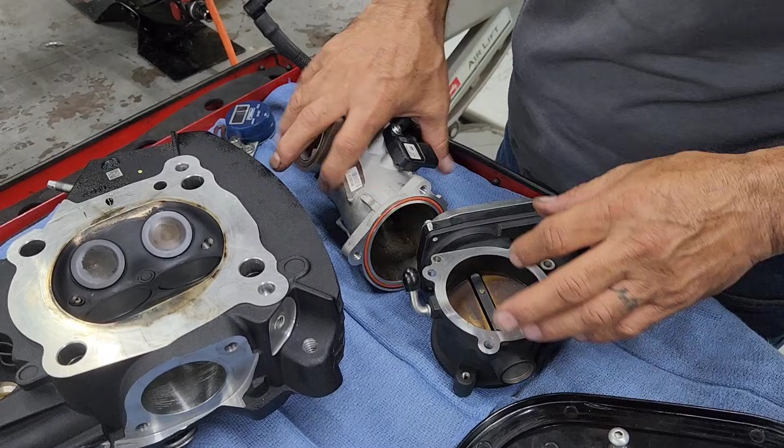But I want to show you the Screamin Eagle throttle body and manifold. So here we have the 64 millimeter throttle body, and here is the manifold. These are some nice Screamin Eagle CNC ported heads, the CNC Extreme ported, and it's a nice head, oversized valve.

What I wanted to show you was the intake runner here on the manifold does not match your port on your head. So we're gonna come in here and port this to match the head, but also wanted to show you that we're gonna go ahead and open this part up here, and then we're gonna open up the throttle body as well to match it, get a little bit more intake in there.

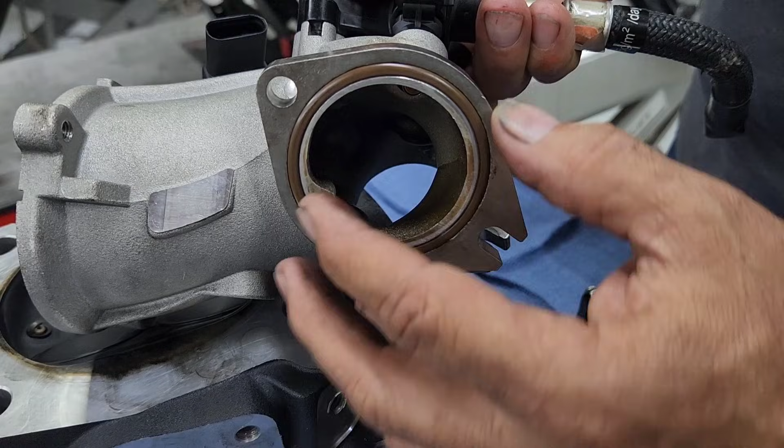Something that I myself don't like very much is, if you can see in there, that design is to help with flow, to get the air to turn and go into the manifold. But what we're going to do is remove a little bit of that. I am going to leave some of it in there, but I'm going to go ahead and start opening that and get rid of some of that so we can get some more flow in there.

So this is now the process of what we're going to do. And I'll show you guys the process as we're going along so you guys can keep up with it.

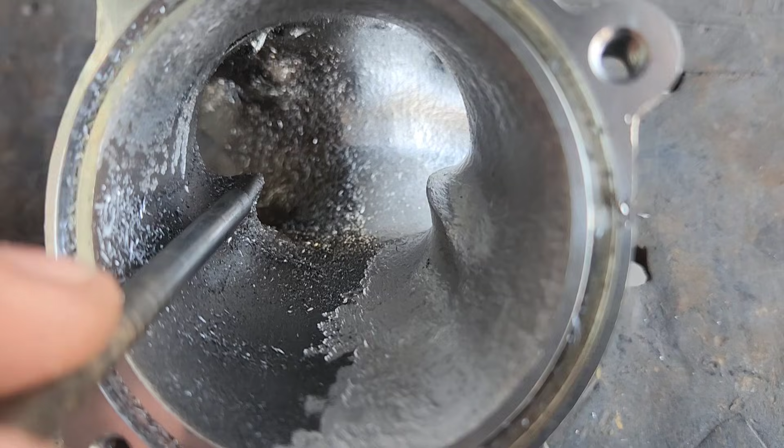So we have started doing the porting on the manifold itself. What I'm going to do is show you, see if I can zoom in here a little bit. So here is the left side. Oh, this is the original way it came. And this part's kind of lifted up high, and this I already kind of grinded down a little bit of this one, started shaping it. I still need to finish doing the shaping, but...

I'm at a point right here where I'd like to show you the difference. So what's happening is, picture you and your buddies in high school running down the hallway, and now you have somebody that's in your way, and you kind of have to bump that guy to go around them. Same thing here. So the air's trying to flow in here, there's some obstruction, and the air needs to go around it. So it does help a little bit to do this curve right here, this turn right here.

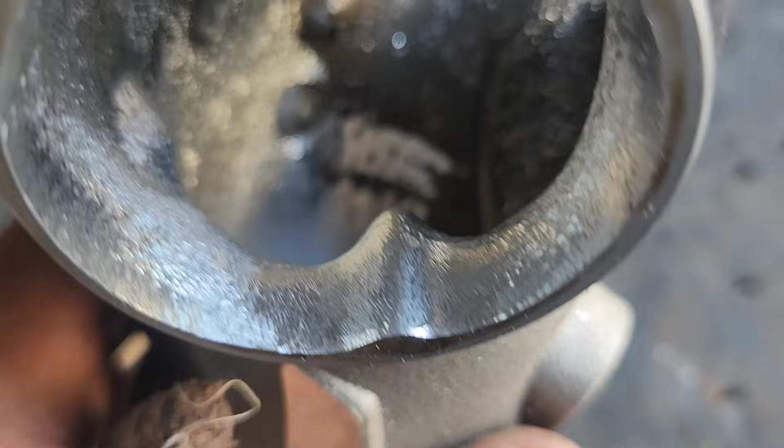So if you go to this side, you can see a little bit here where that curve is. So it does help a little bit, since the airflow doesn't really like 90 degrees, so it's helping give it that turn that's going to go out of here and into your heads. I just want to take a minute to show you that. I'm going to continue grinding the rest and probably show you the process once we're a little bit further. But a good understanding of that is that that is too high for me, at least, and is really obstructing the air. So let me continue with this, and then I'll show you guys as we go along.

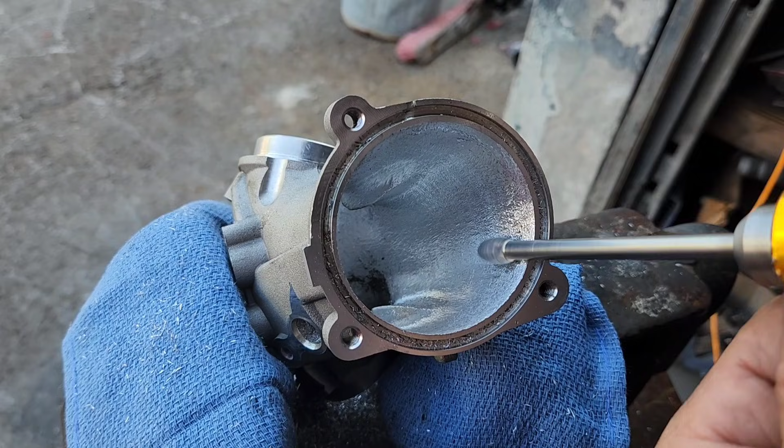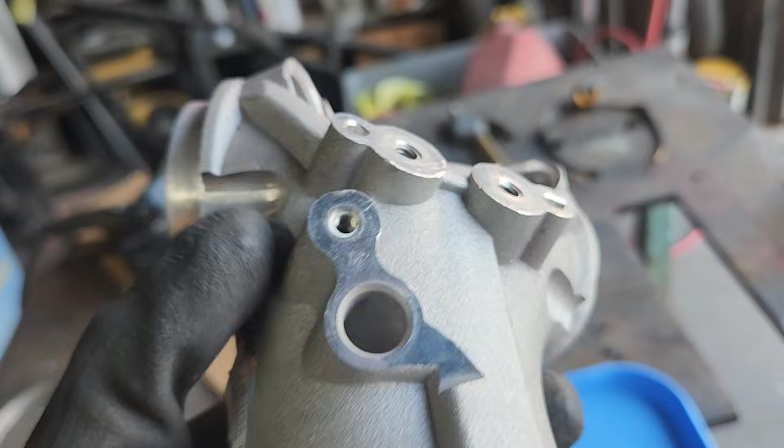Alright guys, so here is the manifold done, already smoothened out. So this just needs to get washed and cleaned, get ready for assembly.

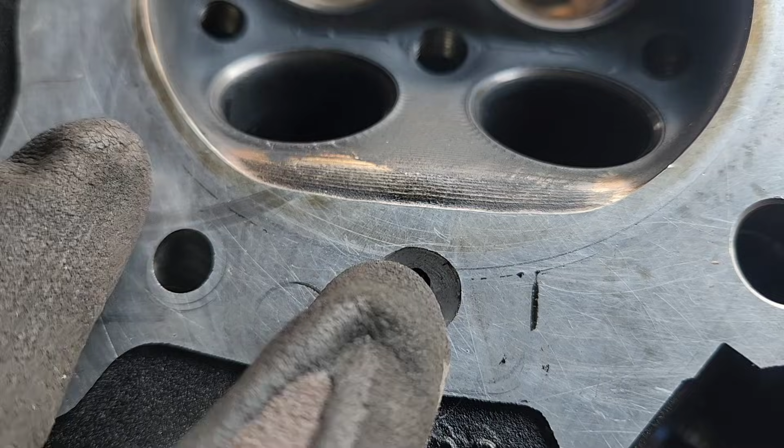So here are the heads. What we're doing now is we machined this and made it tapered, drilled the hole a little bit bigger, and so what we're going to do is weld and plug that hole there. Just did this head here.

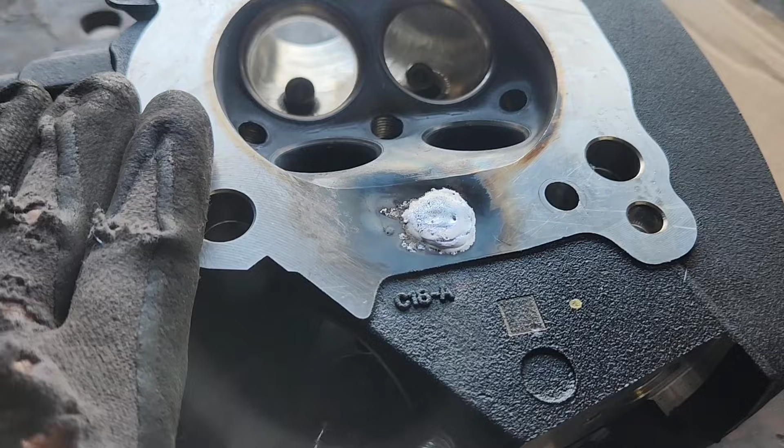So then what we're going to do is set the heads up on the jig, put them on the lathe, machine them down to this deck here, and then we're going to deck the heads probably around 14 thousandths to bump up the compression. What I'm going to do now is finish this head, and I'll get everything jigged up.

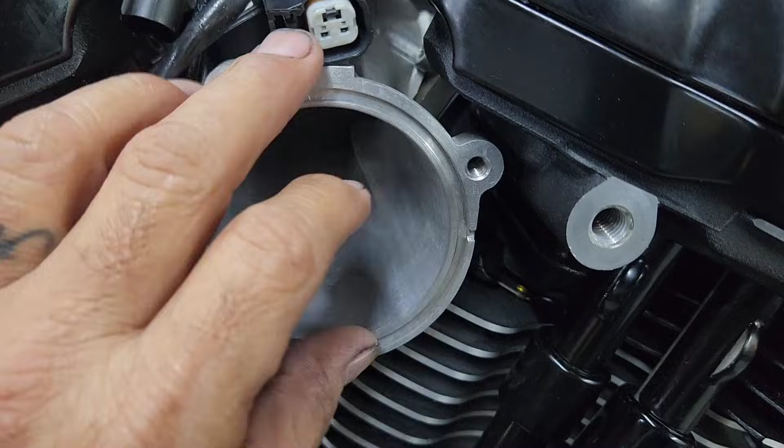So the next thing for me is to machine the inner part of the throttle body. I'm going to chuck that up in the lathe, and then I'll show you guys the machining part.

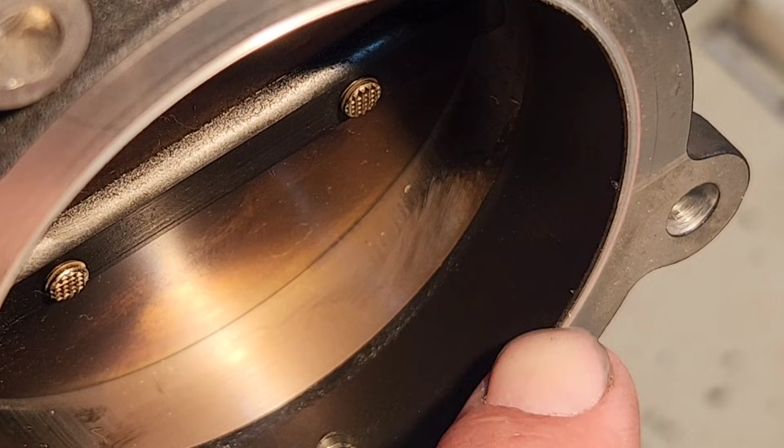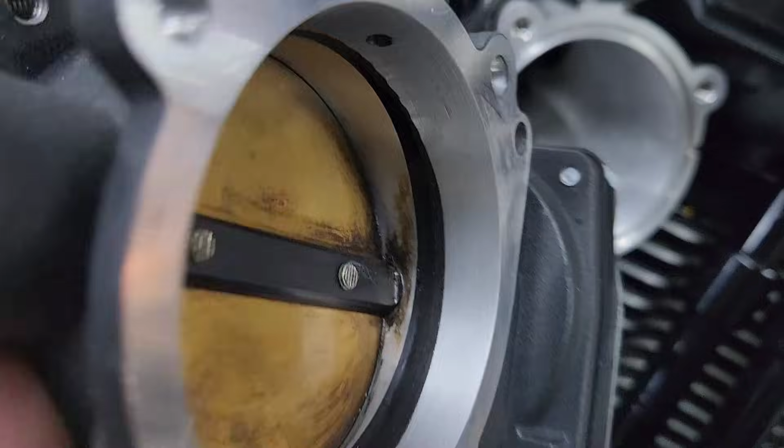Once we have this part done, we're going to take it off, flip it around, and do the other side. Alright, so here is the throttle body machined — nice little taper there.

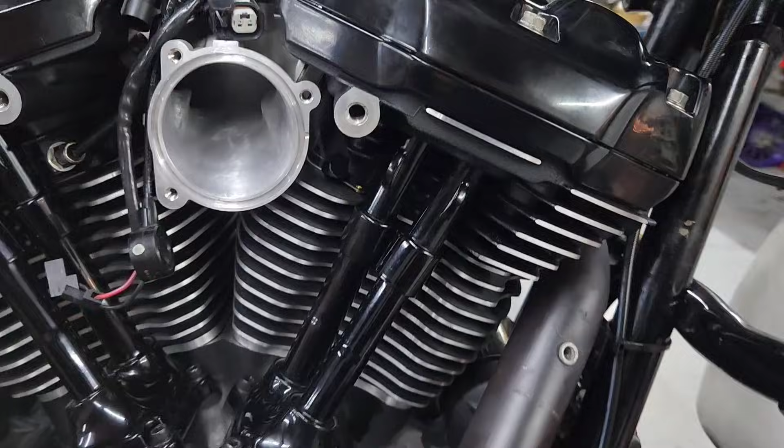So what we're going to do next is install it, get everything buttoned up, put the other rocker box cover on, the oil line and stuff that goes on top, and get everything ready so we can start this thing and do a couple of heat cycles. Let me get going with all that, then we'll continue with getting it on the dyno.

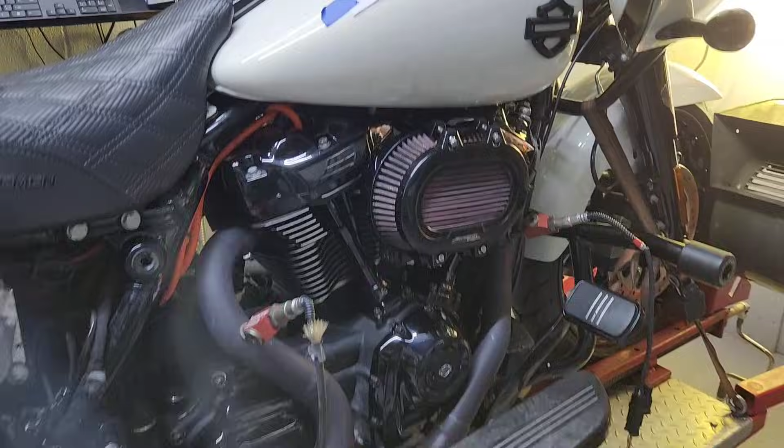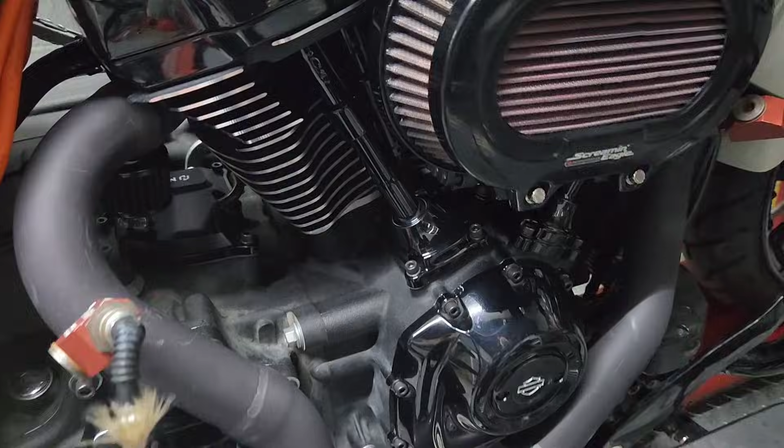Alright guys, so here we go. Once again, we did not perform the motor work on this — this was done at Throttle Harley-Davidson here in McAllen, Texas. It's a 129 cubic inch with an S&S 590 cam and D&D exhaust.

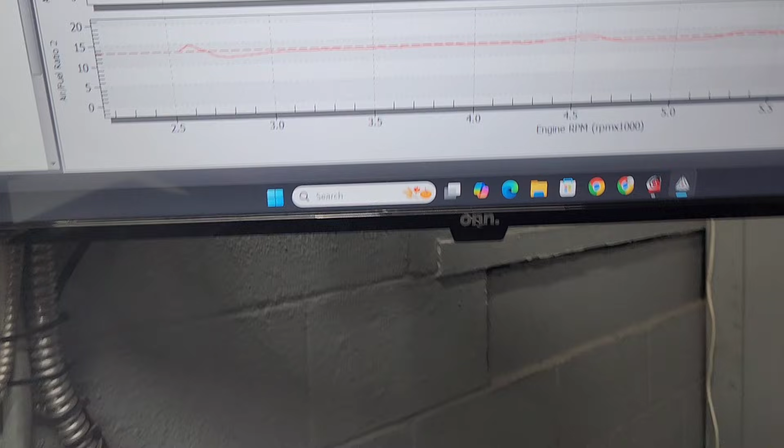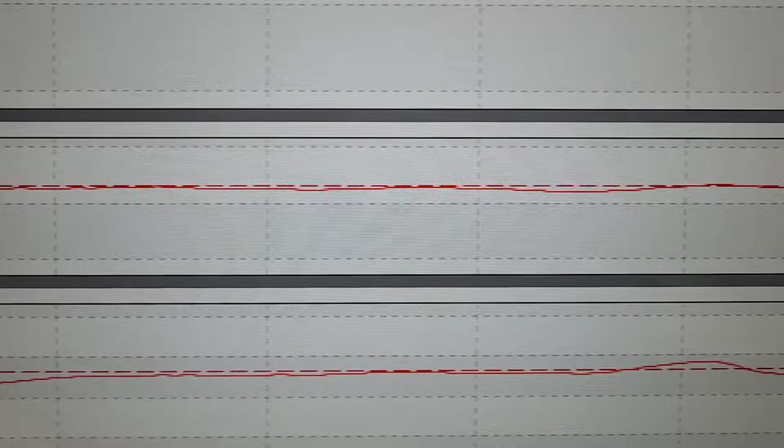This is the second time we dyno tuned this thing, and it was dyno tuned with a Power Vision. Now the first time it was a 129 with an Andrews 485 cam, and it was 136 horsepower, 155 torque — very, very impressive actually. Here are the AFRs. For being a 485 cam, very, very impressive.

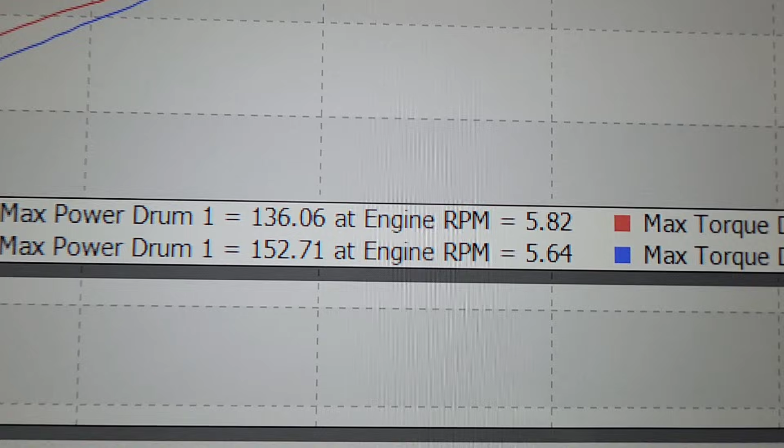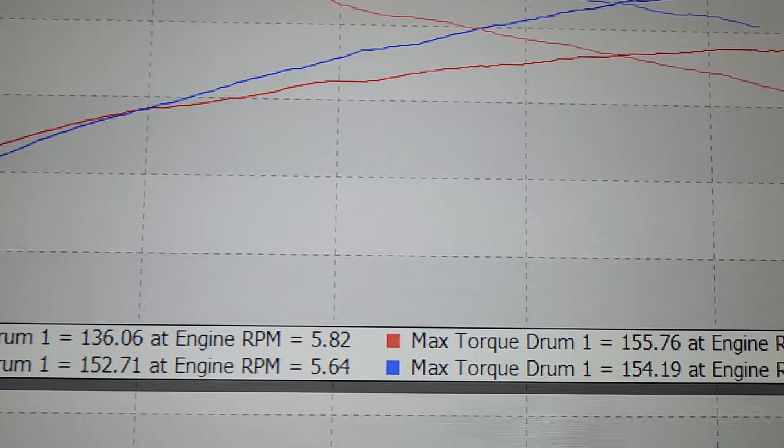So then we re-dyno tuned it and ended up with 152.7 horsepower and 154.19 torque. Here are the AFRs. This is with the S&S 590 cam — we got a lot of gains in horsepower and actually lost a little bit of torque, but overall, give me a minute to shut this off.

Overall, very, very impressive. So let's talk a little bit about the cam difference. The 485 cam's intake valve closes at 29, and the 590's intake valve closes at 43. So what does that mean? The Andrews cam, which is the red one, gives us a little bit more torque here at the beginning because the intake valve closes earlier, and our horsepower gain is early because it also closes earlier.

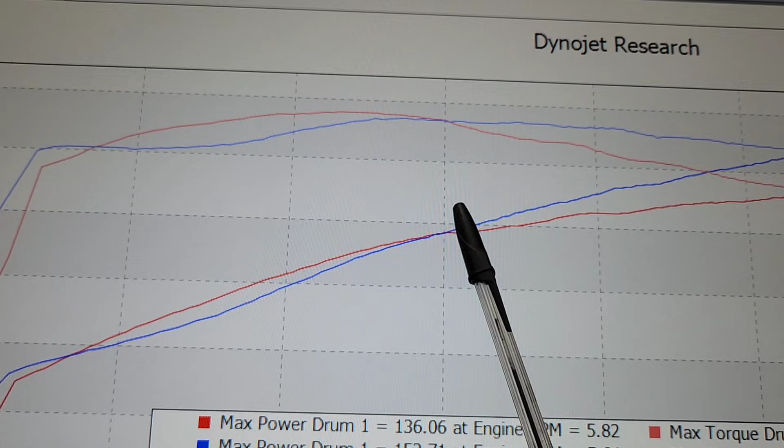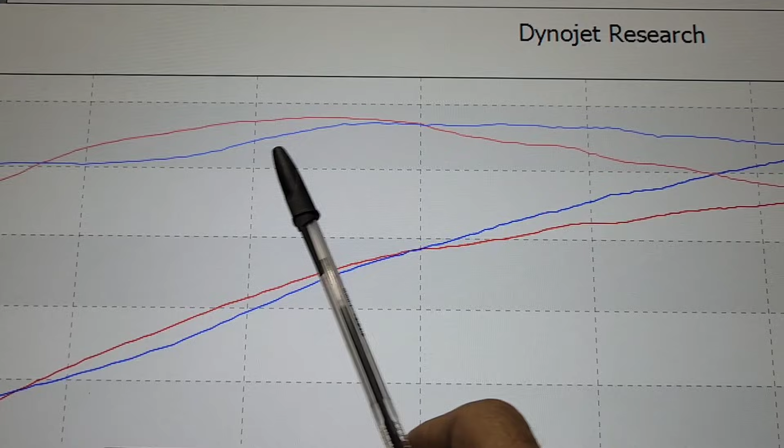The exhaust opens at 52. On the S&S 590 cam, the intake valve closes at 43, so our torque curve is going to be farther forward on our RPM range — it kicks in a little bit later. The horsepower also kicks in pretty good and goes all the way across.

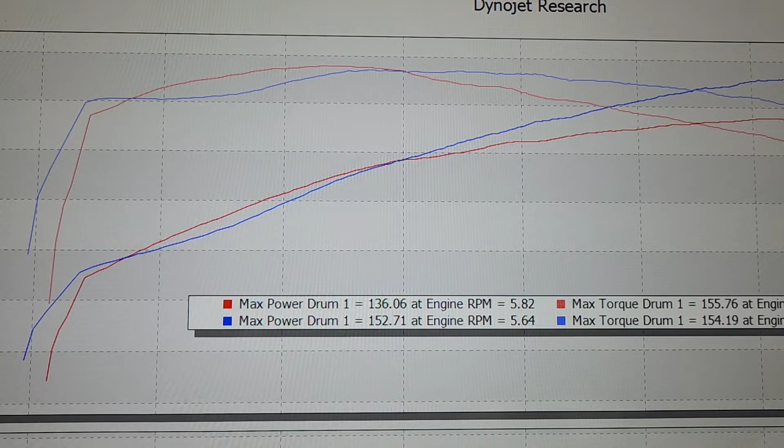So that's why it's very important to talk to your motor builder, talk to your tuner, and see what they recommend based on what kind of riding style you're going to have. But this is very impressive — 152, 154 out of a 129 cubic inch. So it's probably somewhere around, it's over 1.1 horsepower per cubic inch, so it's pretty good.

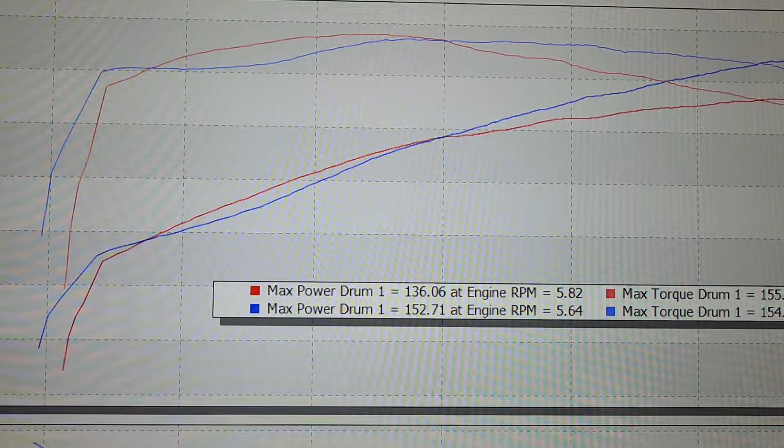So we want to thank Desperado for letting us do this and helping them out with this build. This is very, very nice. I'm going to get it down around the street, make sure it's all dialed in, and have a little bit of fun, do some burnouts, and let it go.